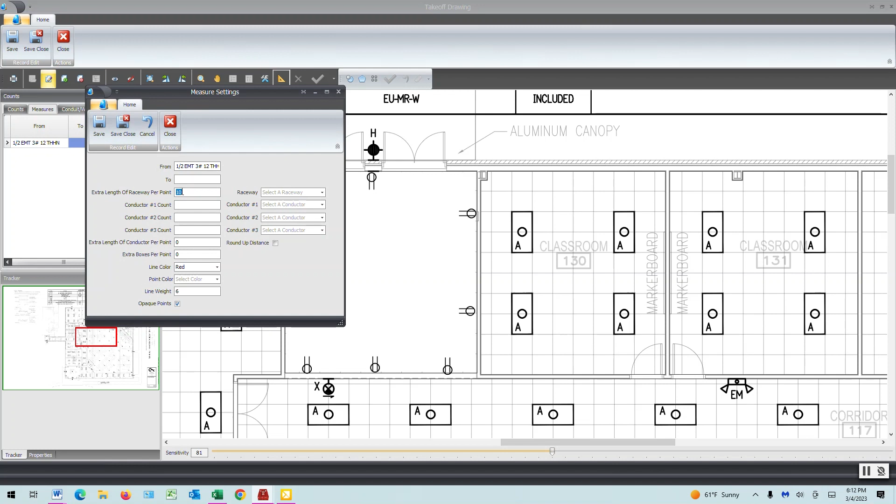So what that means is when you select the control key and this white W appears, the next time you click the mouse, it's going to enter whatever distance you have preset here. So we have it set at 10 foot. So when we measure our down runs, it's going to be 10 foot a piece.

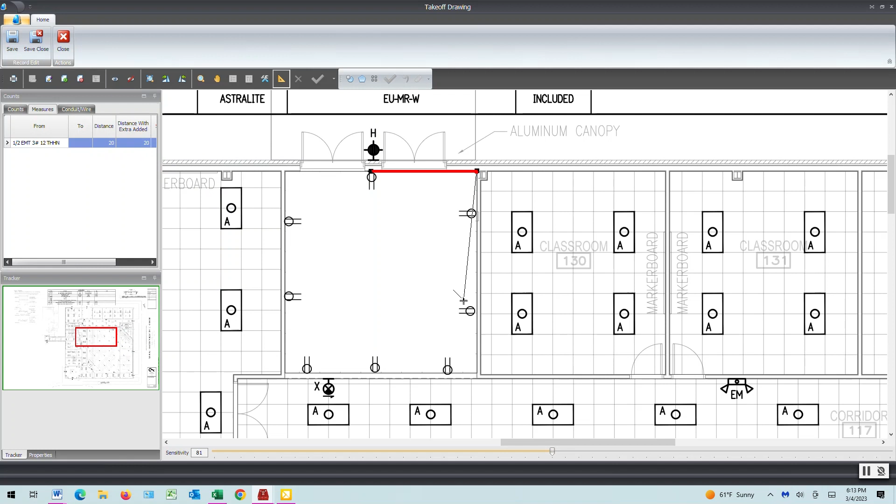So we're going to take this W off, and we're going to also select round up. Close. So now we're just going to quickly just go around this room. We've got 70 foot of raceway, and now we have 1, 2, 3, 4, 5, 6, 7, 8 receptacles. We're going to hit the control key and click it 8 times.

Okay, so now we've entered. We're going to take the W away by hitting the control key. So now our total for this room is 150 foot, including going up and down.

Now you could also, I don't recommend it, but you could also click here, enter the control key, click it, add your 10 foot, and then go around the room. And then when you get here, enter the 10 foot again, click it, take it off, and go to the next one. But it gets really time consuming to do that to me.

So I just like to do a room at a time and do the whole thing, and then add the extra later. So doing it around the room, we have 150 foot. So we're gonna assume that this is the way that you would wire this, and we're gonna assume that you didn't go through the wall. We're just giving an example. So we ended up with 150 foot.

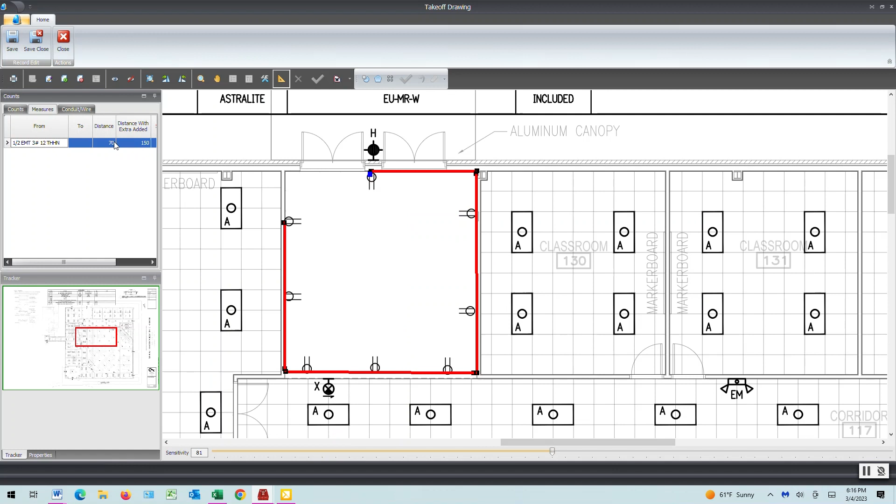So we're going to go back to the software for just a minute. And so we have 150 foot, we have 70, and then we have 150 foot. Save and close. We're going to go to the receptacles. And so we had 8 receptacles. You could say this distance apart was 18.75, and that covers everything that we took off.

You could make this distance apart be 10. That would take those 8 receptacles down the wall, or stub up the wall 10 foot, and then that would cover the stub ups. We could hit save, and then we could go to our branch circuits. And our 1/2 inch with 3 number 12s. You could see that it's 70 foot. So you could enter 70 foot here, and that would take care of the conduit to catch that room.

And you'd do the same thing if it's a whole building. So you'd hit Save, Assembly Details, and you could call this Power Branch. Hit Save, Assembly Details, and that's your conduit for your receptacles. Or you could even say receptacles. Receptacle branch.

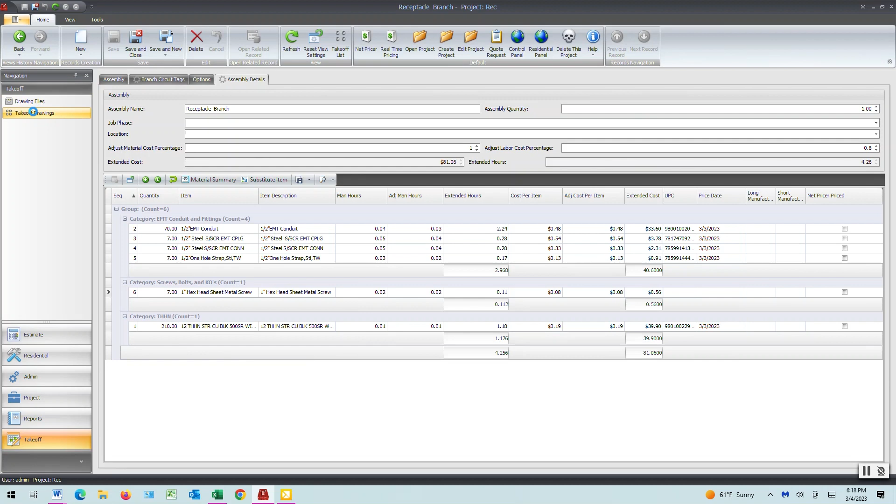So we go back to this room. And we're going to delete this run. And we're going to start a new one. So let's say you ran your conduit trunk line this way. So even if you ran your trunk line this way and you brought each of your receptacles back up to a point, you're almost exactly the same footage as you were before. So you're at your 70 foot plus your 8 drops, you're back at 150 foot.

So don't get too caught up in being exact. It's all going to work out the same, and the branch isn't the biggest part of the job anyway. You want to spend more time on your feeders, but you can just simply go around the room like in a room like this, and when you bid it, that's what I recommend. Now when you actually install it, you may run MC through the walls and pick up extra money, but you don't want to be so tight on your estimate that you miss it.

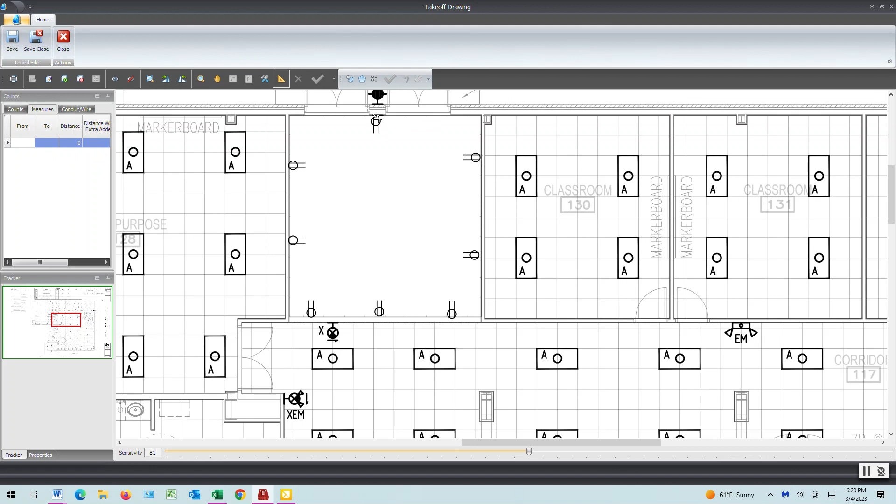For example, we said 8 receptacles times 18.75, and we come out with the same amount as before. And if we'd have scaled it, and we wanted to use the distance apart, we could divide 8 into the distance, and that would be your true distance apart. So I hope this helps.